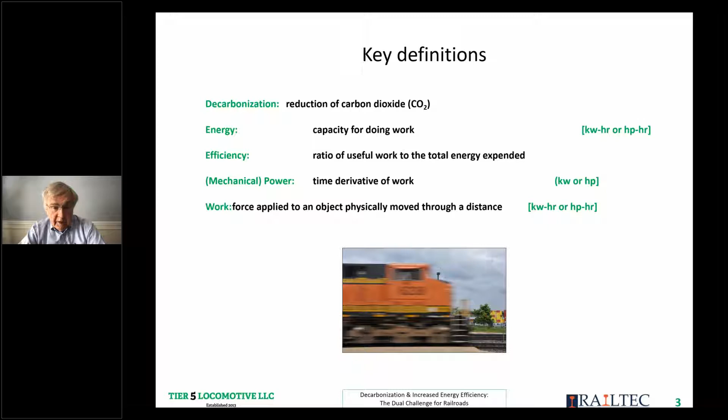And some key definitions. The key one here, efficiency. It's the ratio of useful work or applied energy to the total energy expended in producing that work. And we'll move on here, Emma.

And decarbonization. I think everybody knows about decarbonization and the attempt to reduce and stop the growth of carbon in the world's atmosphere and the issues that are driving it. We're not going to be talking about global climate change and so on. We'll be talking about decarbonization. Next slide.

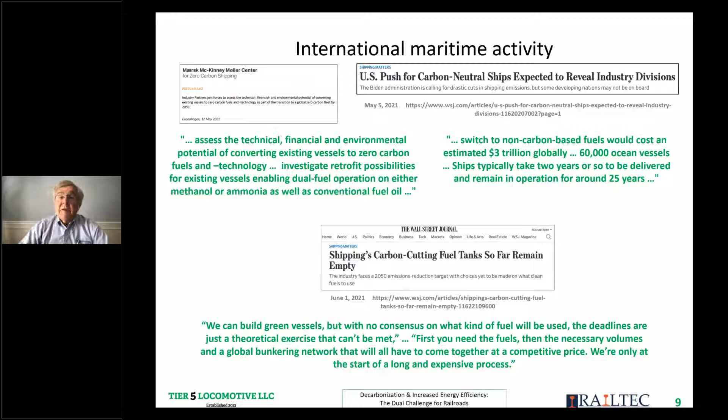And just some key points here. Decarbonization, all of these plans are to eliminate the use of fossil fuels. Any liquid fuels, for example, that would remain in use would be considered renewable. You would not be emitting more carbon than is being reclaimed.

It would be to increase electrical transmission to accommodate the variable productivity of both wind and solar. Wind doesn't always power turbines all the time, and the sun obviously doesn't shine more than about 60% of the time, depending on the time of the year and where you are on the planet. So you have to be able to eliminate and replace fossil-fired generating stations, for example, that could theoretically be operating 100% of the time until they go into an overhaul maintenance cycle.

It also is to develop and install large-scale energy storage. Batteries, for example, that can store wind and solar power to be reused when the wind may not be blowing in a certain area or the sun is not shining. It is to enable the manufacturing of zero carbon hydrogen. And an important point that we all need to keep in mind, even though hydrogen, when it's used, for example, in a fuel cell, you have a zero emissions point source.

But currently, for example, 95% of all hydrogen that is manufactured in the United States comes from steam methane reforming, which is a process where you burn natural gas to produce steam, and you mix natural gas and the steam at high temperature and pressure and pass it over a catalyst to strip the hydrogen from the carbon, or from the methane molecules. So currently, manufactured hydrogen is not zero carbon itself.

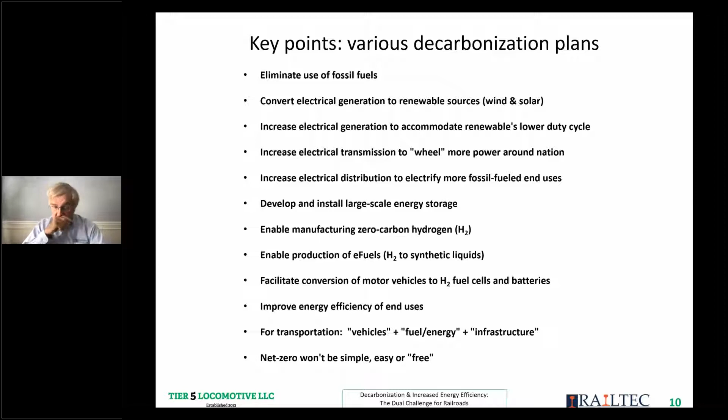The Sankey diagram that you see in the upper left is from the Lawrence Livermore National Lab of the Department of Energy. Lawrence Livermore produces this Sankey diagram every year. This is the diagram for 2020, showing all of the estimated energy production and consumption in 2020, last year.

And you can see, according to Lawrence Livermore, we generated roughly 92.9 quadrillion BTUs, which is the equivalent of about 668 billion gallons of diesel fuel. And the Class 1 railroads in 2020 used roughly 3.4 billion gallons, which is about 0.47 quad. And you can see that black arrow in the middle of the Sankey diagram.

That's pointing to a line of biomass energy going up into residential heating, which is about 0.48 quad. That very slim, slightly green line is equivalent to the freight railroad energy use in 2020. So again, we're only 0.5% of all U.S. energy consumption, and only 1.9% of the total petroleum that was used in 2020.

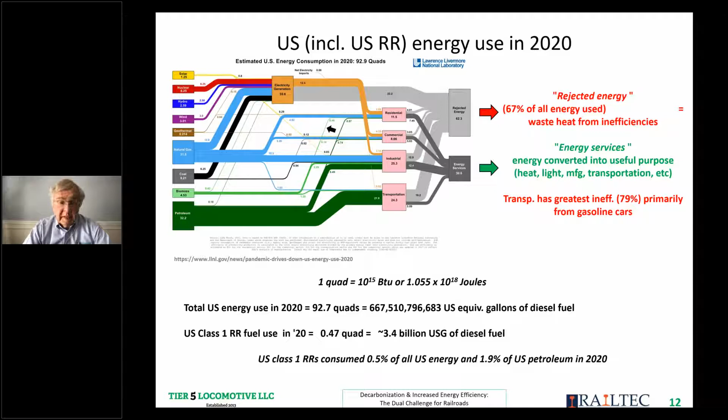And the two graphs on the left are from a paper that I wrote and published through the ASME, American Society of Mechanical Engineers, in 2019. I did a 95-year retrospective look at freight railroad energy use in the US. And the red line in the top graph prior to 1960 was the total energy used. Basically, I took all of the coal, crude oil, electricity, and a small amount of diesel fuel that was reported to the Interstate Commerce Commission prior to 1960. And every 5 years, I converted it all to diesel gallons equivalent.

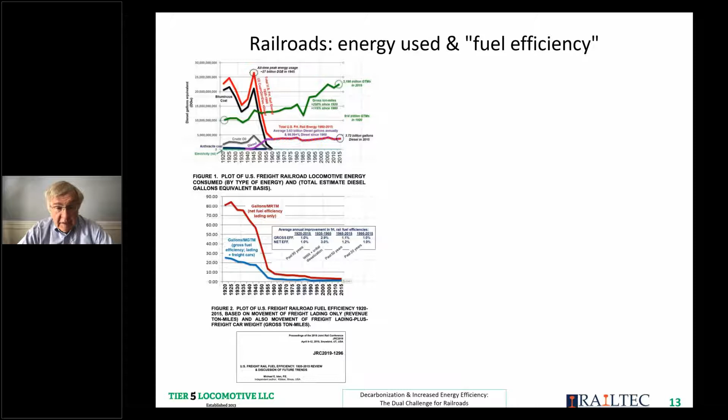And you can see the peak year for energy used by the freight railroads in the US was 1945, the last year of World War II. And that steep decline in the red line from 1945 to 1960 reflects the dieselization of the railroads. And essentially, if we can click again, Emma, what we saw was basically a one-time 700% improvement in what we call fuel efficiency, gallons per thousand gross ton miles, due largely to eliminating the gross thermal inefficiency of steam locomotives. And over the past several decades, fuel efficiency has been improving only modestly. One more click, Emma. Thank you.

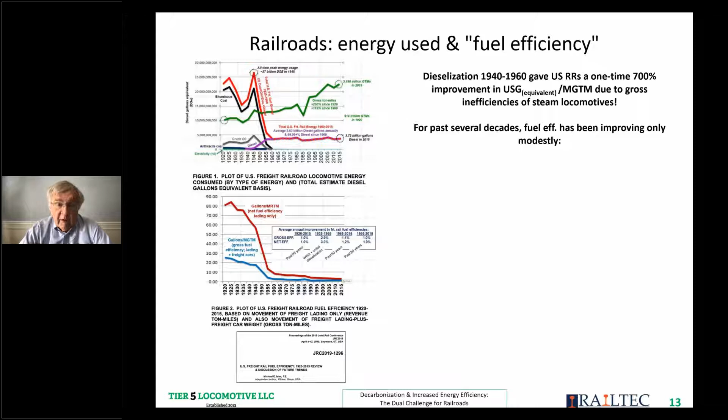And this is from a presentation that Southwest Research has presented to all 7 of the Class 1s. You can see that the industry has been making about 1.5% improvement each year over the last 10 years since 2011. And by my measure, I saw about a 1 to 1.5% improvement overall in gross fuel efficiency from 1960 to 2015.

So if you take a 1.5% improvement in fuel efficiency and you compound it out to 2030, we should see about a 20% improvement in fuel efficiency. But the question we all have to ask is, is that enough? And I think the answer clearly is no.

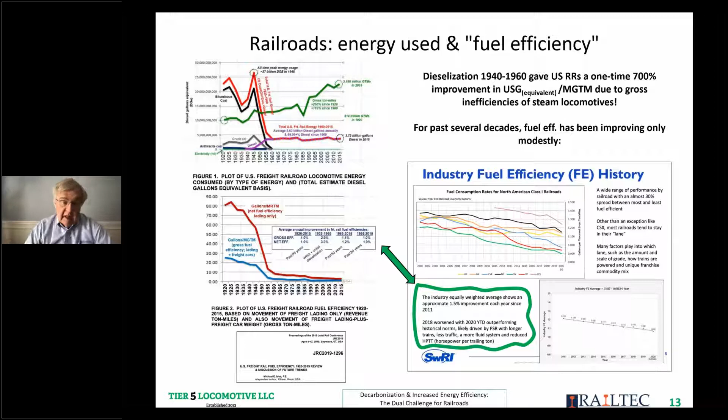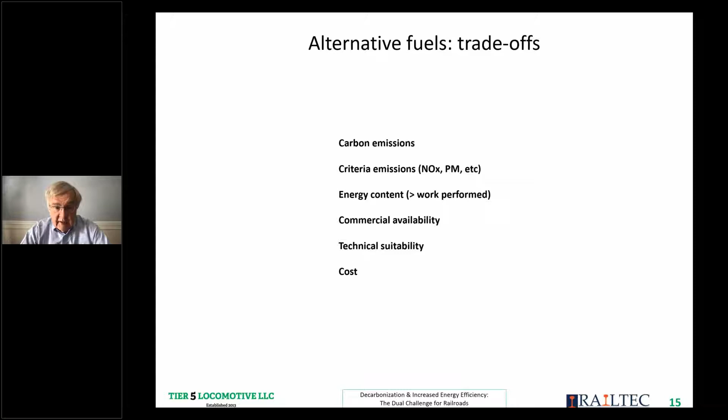There are multiple options, and in some cases you will reduce certain emissions, and in other cases you'll reduce some but not all. And in many of these situations, you actually will end up using more volume of fuel. So again, this is a very complex alternative that needs to be looked at carefully, but as Steve Fritz puts it, it's one of the early control knobs that the railroads could exercise and use to reduce their carbon emissions. Next slide, please.

Okay. I want to mention again, I've mentioned this several times in industry presentations. We all need to be aware of what's coming with heavy duty trucks with the efficiency improvements. Starting in 2010, the Department of Energy here in the US and the truck industry, manufacturers of tractors, trailers, truck and tractor appliances, transmissions, engines, etc., spent $284 million focusing on aerodynamic improvements for trucks. That was called Super Truck 1.

That was followed by another program called Super Truck 2, which ended in 2020, and that was a $160 million investment. And now Super Truck 3 has been announced. It's another $200 million. So over the next several years, the total spending on truck efficiency improvements will total $644 million. Half of that from the federal government, half from the truck and truck suppliers. Next slide, or next click, Emma.

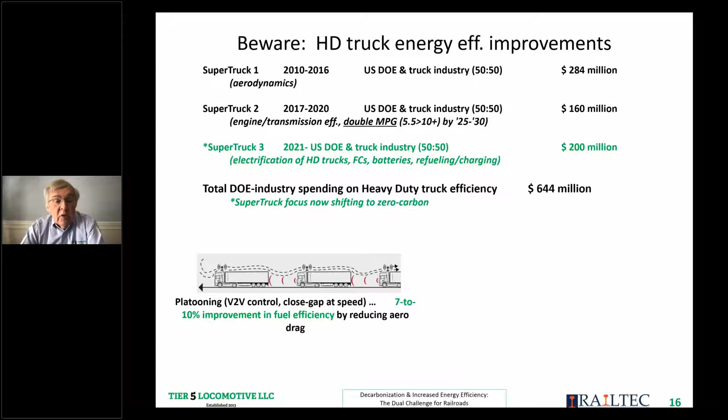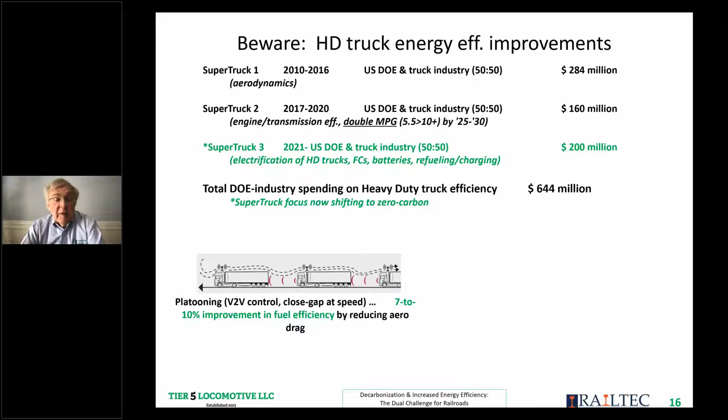And in addition, platooning, which is the close coupling of trucks with about a 12-foot gap between the trucks where you have vehicle-to-vehicle control, that will gain heavy-duty trucks another 7 to 10% improvement in fuel efficiency. And the last click, Emma, autonomous control of trucks by eliminating driver variation is projected to improve mile per gallon fuel efficiency for heavy duty trucks by another 10%.

Real quickly, truck technology is moving ahead very fast. The large truck fleets typically renew their tractor fleets every 2 years. I'm talking about companies like Schneider, Werner, Swift Transportation, and so on. And TuSimple, one of the companies in the autonomous world for trucks, they are partnering with Navistar to sell high automation Class 8 trucks by 2024.

And they gave the example of a 951-mile movement of fresh vegetables from Arizona to Oklahoma City. If you have one driver, it currently takes 24 hours because the driver has to have 10 hours of rest, whereas the autonomous truck could make that movement in 14 hours. So we're talking not only efficiency improvements, but an impact on competitiveness vis-a-vis, for example, the rail industry. Next slide.

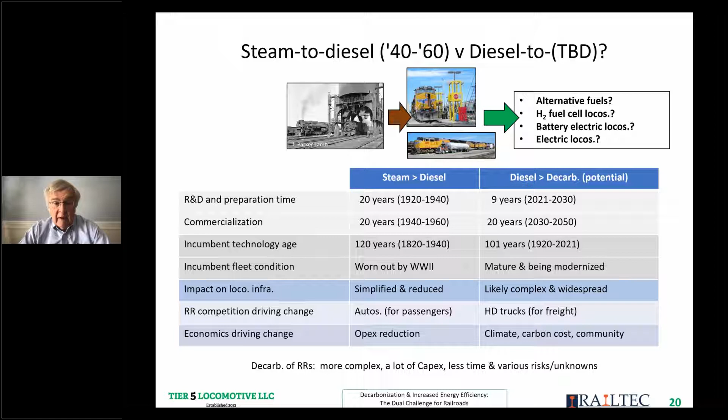And the key point here, one reason largely why the railroads converted from steam to diesel from 1940 to 1960 is that the massive fleet of steam locomotives was largely obsolete and worn out by World War II. So there are a host of differences between the steam to diesel era and what we may be looking at. Next slide, please.

Okay, the economics of railroad dieselization. This is from a paper that was published in 1951, giving 6 reasons why the railroads dieselized. Thermal and energy efficiency was several times greater. Availability took a huge increase. Tractive effort was higher with diesel locomotives compared to even the biggest steam engines. Dynamic braking was created. Repair costs were half that of steam, and the modular design of diesel locomotives allowed eliminating the assignment of specific locomotives to specific trains.

Next slide. 5 of these 6 reasons for dieselization, we're not going to be able to book them again. The only one we're going to be able to book potentially is thermal efficiency advantages going to some of these alternatives, because a lot of these things have already been rolled into the economics of railroads as we know them today. So we won't be able to count a lot of these things in our economic analyses. Next slide.

Another question at the bottom: if a railroad in the future, let's say Railroad A, chooses to use one technology to decarbonize and Railroad B chooses another technology, but they both have joint line operations where they operate directionally on each other's railroad, what will the railroads do? What if one railroad opts for, let's say, hydrogen fuel cells and the other opts for electrification or battery electric locomotives? How will the railroads meld these alternative technologies together? Next slide.

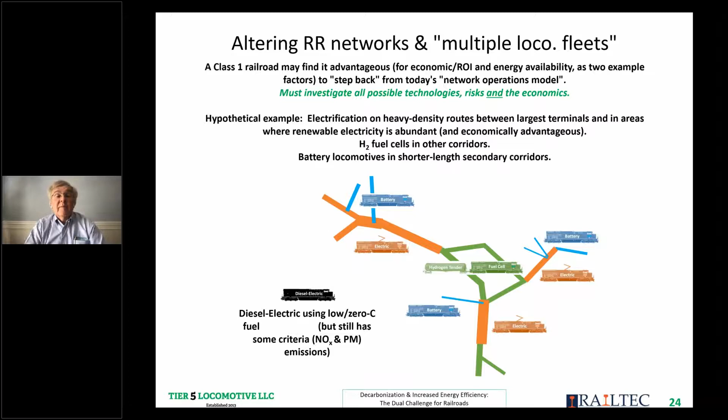Okay, the incumbent technology is diesel electric locomotives. So again, we take a liquid fuel, convert it to mechanical energy in an engine, to electrical energy in an alternator, and we go from AC to DC, pass it into inverters, create a synthetic AC for AC locomotives, and we produce work, and any dynamic brake energy is lost as waste heat.

The key point here is at the bottom. We have compatible operation across a continental network in 3 countries. We have a compatible parts supply, maintenance skills, and facilities. We have compatible refueling infrastructure, and we have compatible and universally available fuel, either petroleum diesel, biodiesel, or some renewable, and it's all available via pipeline, truck, barge, etc.

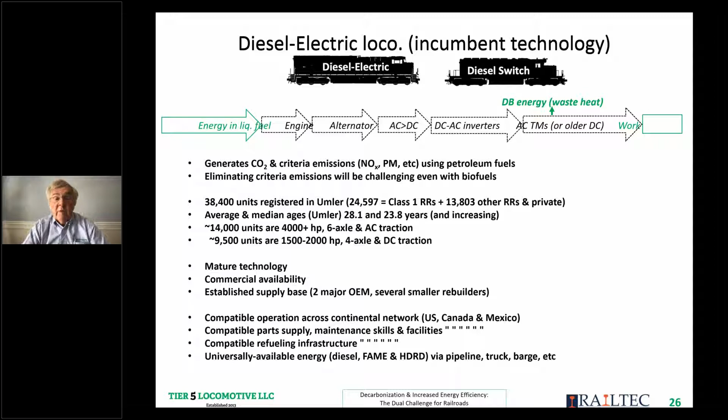Next slide. One of the alternative technologies, for example, is hydrogen fuel cells with batteries. We would be taking liquid or gaseous hydrogen and converting it into electricity in fuel cells, using it to charge onboard batteries or go directly into the inverters to produce AC power at the traction motors, and any dynamic brake energy that's generated could be captured by the onboard batteries to the extent that the batteries can recapture that energy. Going to the very bottom, however, there is no such operation right now in any of the 3 countries.

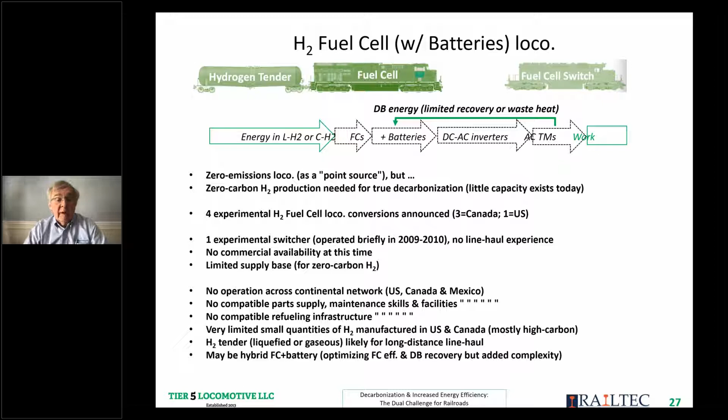There's no parts supply, maintenance skills, or facilities. We have no refueling infrastructure. These are all things that will have to be created, acquired, installed, and operated. Again, there is a limited amount of hydrogen manufactured in the US and Canada. Most of it is high carbon. Line haul locomotives will probably, in my opinion, need hydrogen tenders, either liquefied or gaseous. And again, I'm pointing out that the locomotives will be a combination of fuel cells and batteries. And we'll talk about that a little later here. Next slide, please.

Okay, some brief comments about hydrogen compared to methane. Hydrogen, particularly when it is liquefied, cryogenic liquefied hydrogen, is the second coldest material known to man. The coldest material is liquefied helium, which is just 7 degrees greater than absolute zero at minus 459 degrees Fahrenheit. You can see that liquefied methane is about 260 degrees below zero Fahrenheit, and liquefied hydrogen is 423 degrees below zero.

Hydrogen is exceptionally light and not dense compared to air. It only has 7% of the density of air, whereas methane gas is 55%. It's much heavier. And a key point here, and I'm simply pointing this out, I am not anti-hydrogen, but I want to point out some realities here. The flammability range for hydrogen is 4 to 74% by volume mixed with air, whereas methane gas is flammable between 5 and 14%. And the minimum spark energy for ignition is 2/100ths of a millijoule, which is a measure of energy, and that is 1/14th of the spark energy needed to ignite methane and air mixture.

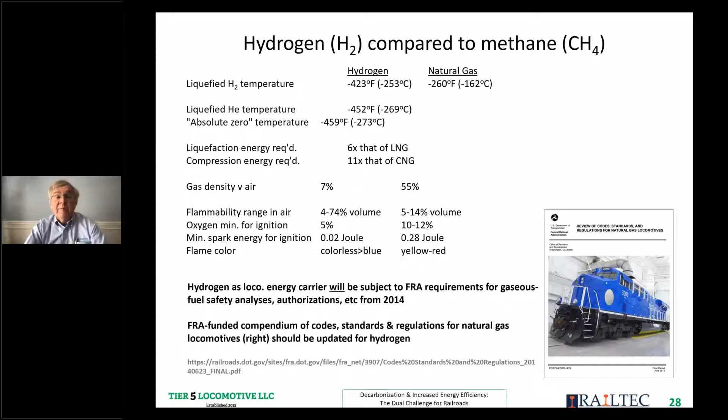But the key point here is that locomotive shops will have to be modified for National Fire Protection Association and regulatory codes to accommodate the presence of any hydrogen gas, similar to methane gas. And this means explosion-proof electrical devices such as motors, switches, lights, heating fixtures, etc., increased ventilation, etc., unless you bring a gas fuel locomotive into the shop and you know that all of the flammable gas has been purged from the locomotive. So the use of gaseous fuels has a potential to drive a fairly large change in shop infrastructure. Next slide, please.

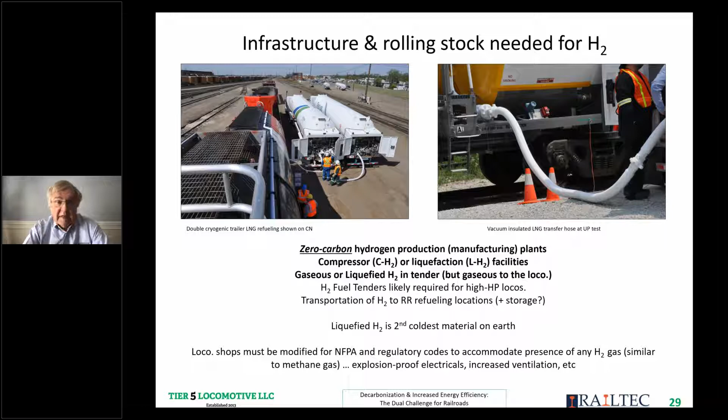All right, let's go back to hydrogen fuel cell locomotives. You will likely have a combination of fuel cell stacks in series to add the voltage to get up to roughly 1,000 volts. The fuel cells could provide electrical energy directly to the traction motors through the inverters. And when less traction energy is needed, the fuel cell energy could be used to recharge the propulsion battery. And of course, you can capture some dynamic brake energy and put it back into the batteries.

But what I'm pointing out here, let's say that you have a half hybrid. It's 50% fuel cell power and 50% battery power, roughly 1.6 megawatts of fuel cell and 1.6 megawatts of batteries. So you have a 3.2 megawatt locomotive, roughly 4,300 electrical horsepower. If, for the specific train, the route, the grade, you are running for so long that you actually draw down the batteries, once you lose the charge in the battery, you in effect regress back to having energy and power only from the fuel cells. So this kind of a 50-50 hybrid locomotive, or whatever ratio you have, could become very route specific.

Whereas with a diesel electric locomotive, again, the only constraint is how much fuel do I have in the fuel tank? And I can run over any route at any speed with any kind of train, and I have a relatively long distance and time to operate. So these are some factors to consider. Next slide, please.

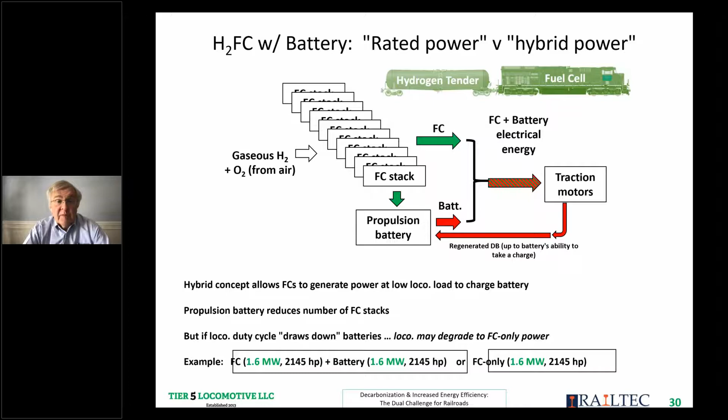So fuel cells in general have a maximum efficiency at the lower power levels, whereas diesel engines, for example, the maximum efficiency comes at the higher throttle settings. So you have a situation where if you have a fuel cell locomotive in, let's say, a line haul or road application with a lot of energy being required, you could potentially be operating at less than the maximum capacity of the fuel cells. So these are just some of the details that will have to be looked at if and when we migrate toward fuel cell propulsion.

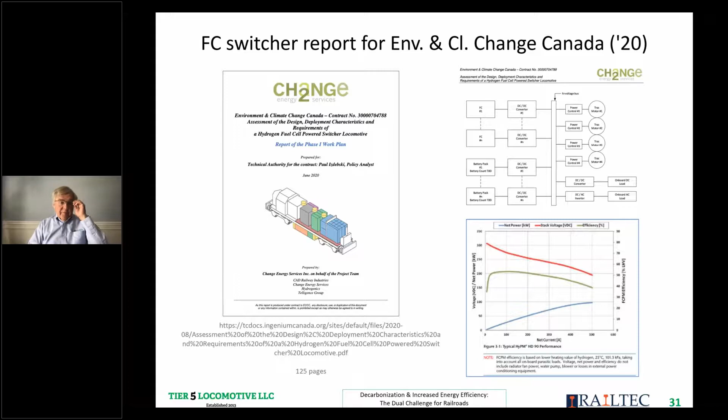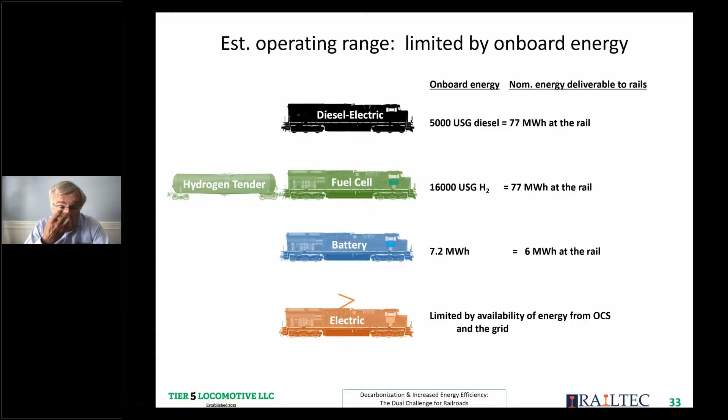Capturing dynamic brake energy, yes. Diesel electric locomotive, right now we have no batteries to store that energy, so we waste it all to the atmosphere as heat. With a fuel cell battery hybrid locomotive, we could recapture dynamic brake energy to the extent that the battery on board has capacity to absorb it. With a battery electric locomotive, the same thing. Does the battery have sufficient capacity to absorb that energy? If it doesn't, you'll have to dissipate whatever excess energy you're generating as heat.

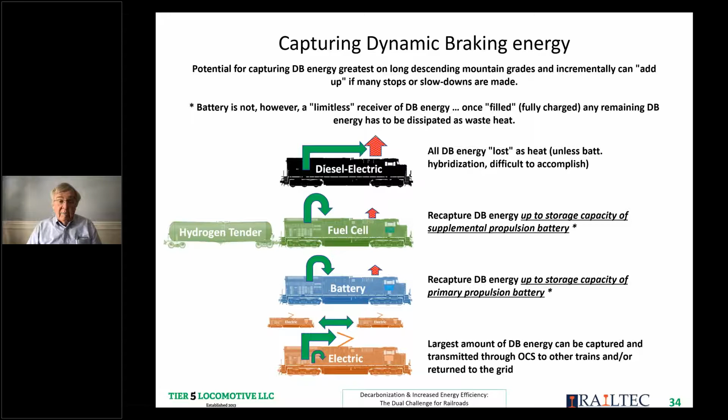With an electric locomotive, potentially, you can take most of that energy and you can pass it back into the catenary and pass it to other locomotives requiring propulsion energy, or potentially back into the grid. So dynamic brake energy recapture is a very good area that we need to look at, and there will be different forms of doing it and probably different extents to which it can be accomplished.

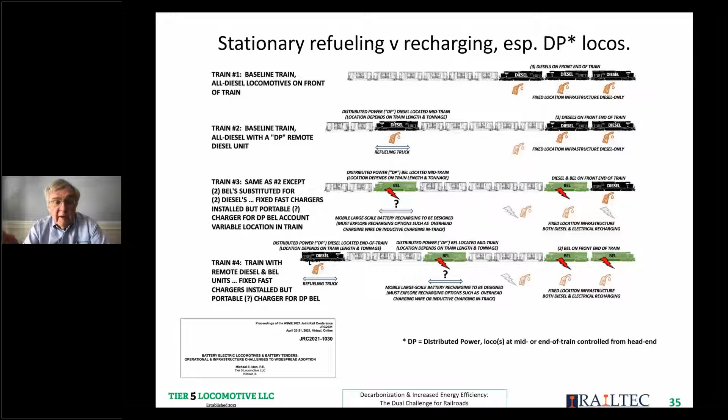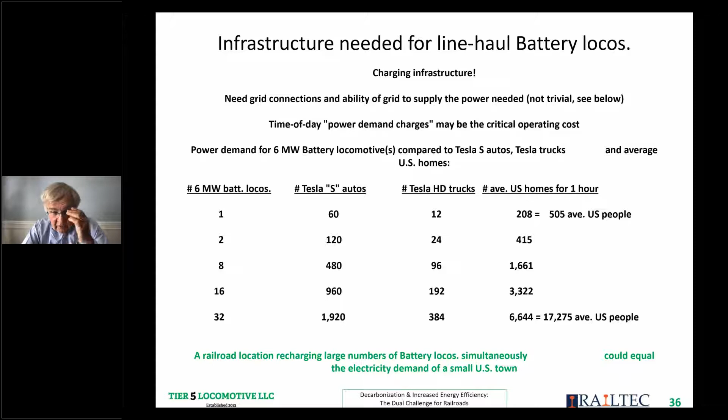North Platte, Nebraska, where UP has the world's largest locomotive shop and locomotive yard, has a population of 23,000 people. So if I have to charge 32 battery electric locomotives, it's like adding about 2/3 to the population of North Platte, Nebraska. I'm pointing out North Platte for the reason of, let's go to the next slide.

Basically I've looked at a satellite photo of North Platte. In the upper right, you can see what's referred to as the eastward run-through refueling, where trains pull in and the power at the head end is refueled, sanded, serviced, inspected, etc. And on this particular day, when this satellite photo was taken, there were 8 trains occupying all 8 through service tracks, a total of 16 locomotives.

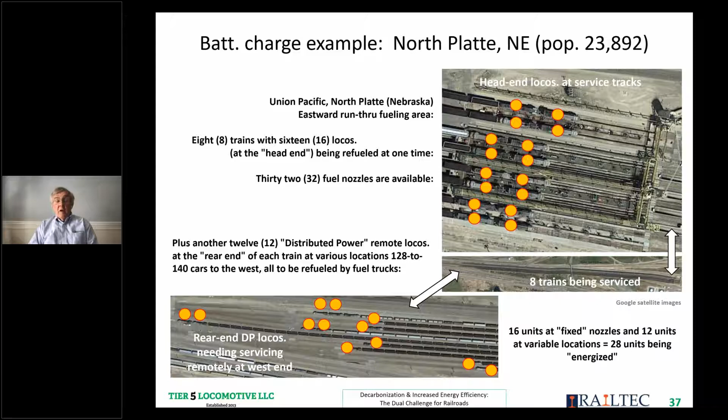And at the rear of those 8 trains, farther to the west, were another 12 locomotives at different locations, depending on the length of the trains. So in all, we had 28 locomotives that could have been refueled with diesel fuel at any one given time here. So, you know, refueling trains is not as simple as simply pulling a locomotive up to a nozzle, a plug, or a hydrogen nozzle. Next slide, please.

Okay, an electric locomotive, bottom line, you're depending on the grid, which is a massive infrastructure that has to be built. But again, I'm saying we have to look at what's the infrastructure for electrification versus the infrastructure needed for hydrogen, for example, or for supporting battery electric locomotives.

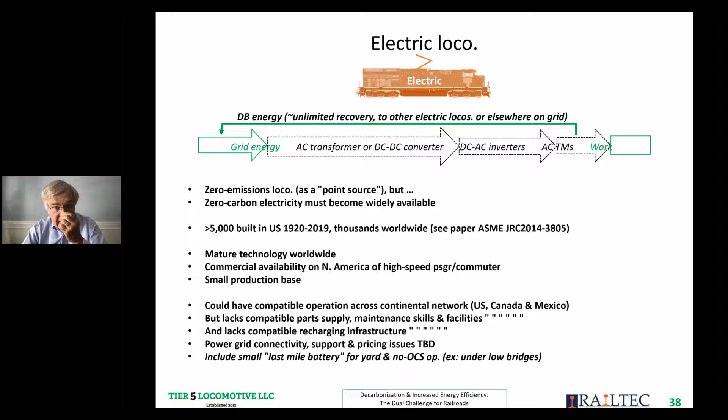And it's possible, in my opinion, that a straight electric locomotive could be equipped with a small battery, so that when you operate under a low clearance bridge, for example, prohibiting the installation of overhead catenary, you could drop the pantograph and operate on the battery through that low clearance zone. Simply pointing that out. And again, this all needs to be looked at largely through an economic analysis. Next slide. Some closing thoughts. Next slide, in the interest of time.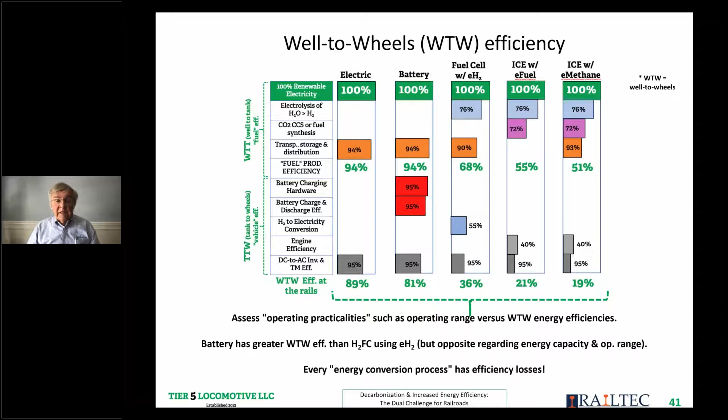Contrast this with the heavy truck industry, where an average year is about 100,000 Class 8 trucks being manufactured. Locomotives are large, very expensive machines as compared to less expensive trucks that are manufactured by an order of magnitude greater every year. Next slide, Emma. And we're coming to the end here.

Recommendations. The first one, this is an industry issue, and the railroads and the suppliers have to be jointly involved. And I'm only going to touch on a few. We need regulatory harmonization between US, Canada, and likely Mexico as soon as possible. We don't have harmonization on various things in the safety world: movement of hazardous materials, use of tenders, etc. We need to have harmonization because we are a continental rail industry.

And the last thing I want to point out, two things. It's okay to build fuel cell locomotives or battery locomotives, test vehicles. But in the bottom line, we will have to have reliability growth testing fleets that will operate using pre-production lines, and I am not in favor of running around test tracks. Test tracks are great for accumulating mileage, but they are not the same as a real railroad. And my mantra here is, I want to test, and then buy, instead of test a little, buy, and then have to modify.